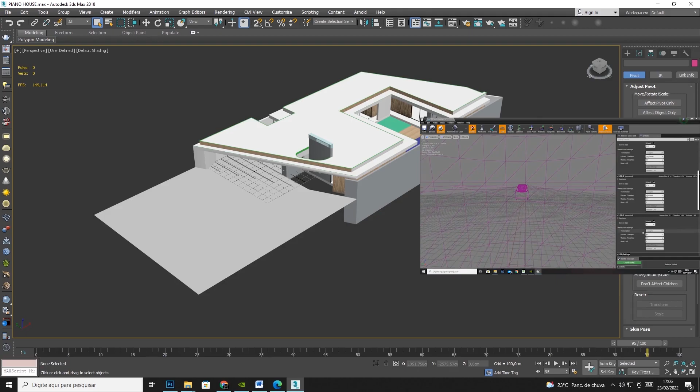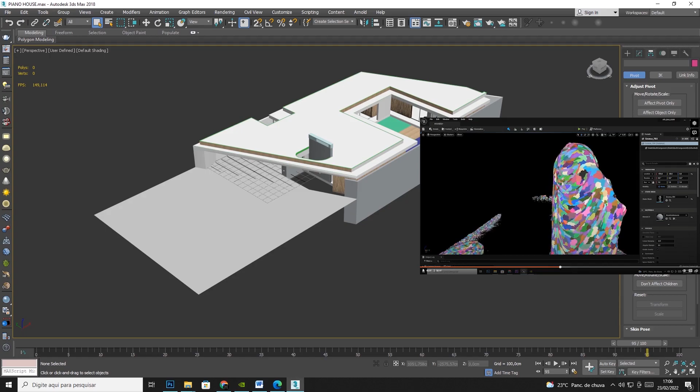We also have LOD in Unreal Engine 5. But in addition, when we get to the optimization module, there is also Nanite, a new technology that came specifically with the launch of Unreal Engine 5. This technology subdivides your object's geometry into clusters. Unlike LOD, this one allows you to use infinite polygon counts for your object. Obviously, there are some limitations, but we will talk about that in the Unreal Engine 5 class, okay? Don't worry about it.

But here in Max, it is already important that we think about how the objects will be optimized in Unreal Engine 5, okay? How do I want to present my project? Like a video, or browsing in real time? If I want to present it as a video, I can render this project. Rendering inside Unreal is much faster than in an offline renderer. When rendering a video, I can abuse the polygon count a little more because I won't be browsing in real time.

Now, if the project is to browse in real time, it's necessary to optimize the geometries well and use the Nanite feature and also the LOD feature that is available in Unreal Engine 4 and Unreal Engine 5. What do I have to keep in mind when talking about Unreal? Optimization and organization. Let's see, for example, how many millions of polygons our whole project has in the scene. How can I do it?

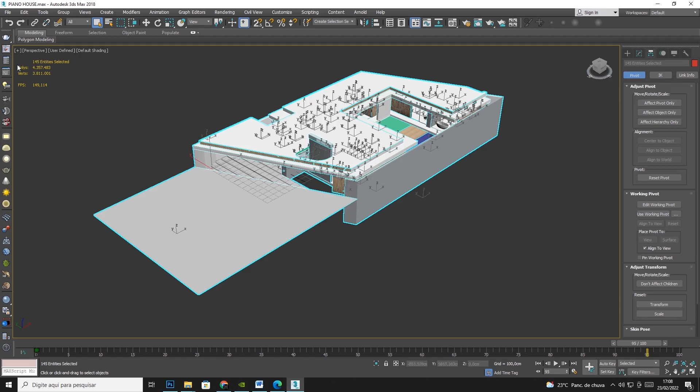In my case, you just select everything because I already enabled the stats in the scene. If your Max doesn't have the stats enabled, you can enable them by clicking here and right here, statistics, you're going to select this and activate this as well. Okay, great. Click right here, and then click right here. Cool. Once this is done, it will show you the statistics.

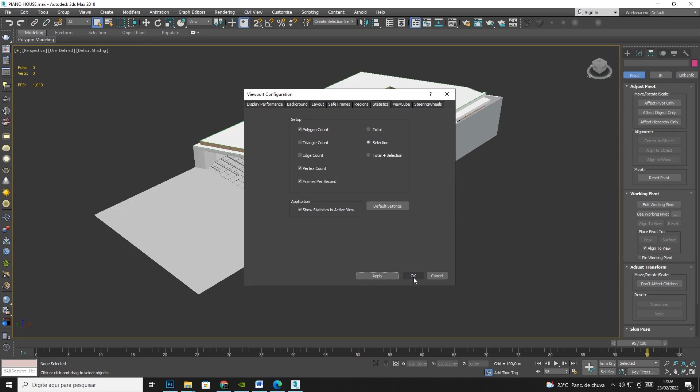So if I click here on the street, I have 2 polygons and 6 vertices. If I click on the ceiling, I have 63 polygons and 122 vertices. If I click on the couch, I have over 200,000 polygons. If I click on the armchair, I have almost 630,000 polygons. That's a lot of polygons to use inside Unreal. So I always have to think about optimizing my scene.

Currently in 2022, the year this video is being recorded, ArchModel blocks, MaxTree blocks, SpeedTree blocks were not meant to run in real time. They were meant to be rendered in offline renderers like Corona and V-Ray. So these blocks did not start from the premise of optimization, but from realism and a high level of detail. Working in real time is actually a great challenge: you need to reach equilibrium between optimization, a low polygon count, and an object as detailed as possible.

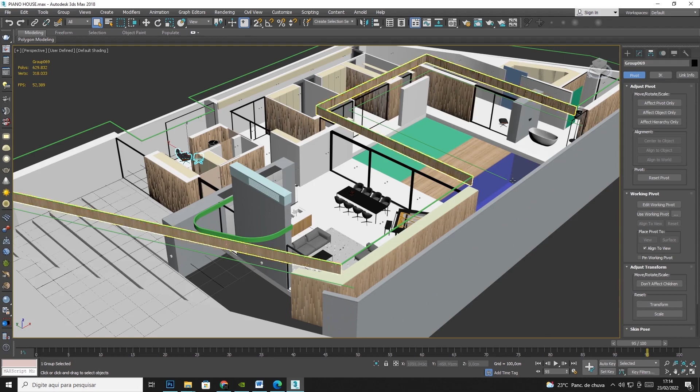Today in 2022, Unreal Engine 5 with Nanite technology doesn't support Nanite on objects that have mesh deformity. What is a mesh deformity? It's an animation, for example. Let's take this bathtub here, and let's think that I'm animating this bathtub, and I'm going to add a modifier, which is the noise modifier.

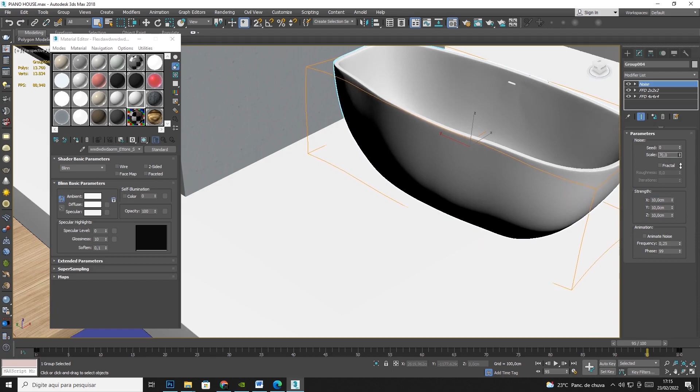Let's change the geometry here to 10 centimeters. Let's see. Look, you can see the mesh being deformed, right? And this deformation is done in geometry. When we use the Nanite technology, it is not possible to apply Nanite to objects that are deformed, okay?

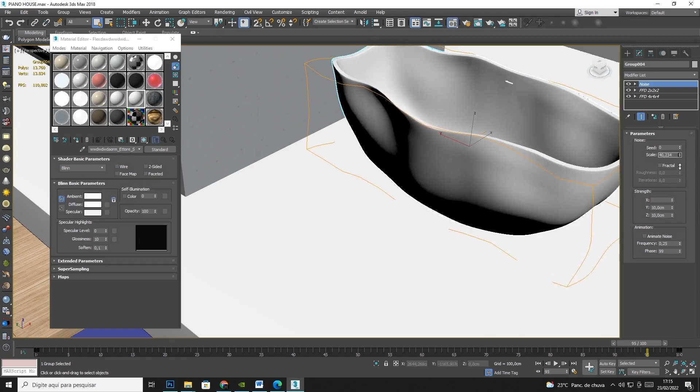For example, if you have a real-time character that is walking in your project, that character cannot use Nanite for optimization because the leg movement causes deformations in the geometry. And Nanite does not support these deformations of the geometry. So in this case, you would use LOD because LOD will support the deformation.

So let's think about this project here. We won't have any deformity in the geometry, okay? The bathtub will not be animated, and there will be no deformity. Cool? If your object, for example, is going to be animated and is going to move like this, and it doesn't have any deformity, there is no problem, okay?

Nanite will work, okay? The Lumen, which is the lighting system we use on Unreal, we'll talk about it later, don't worry about it. If your object has deformity, it won't be compatible with Nanite, okay? Then you will have to use LOD. We're gonna talk about it. Let's get back to the polygon count.

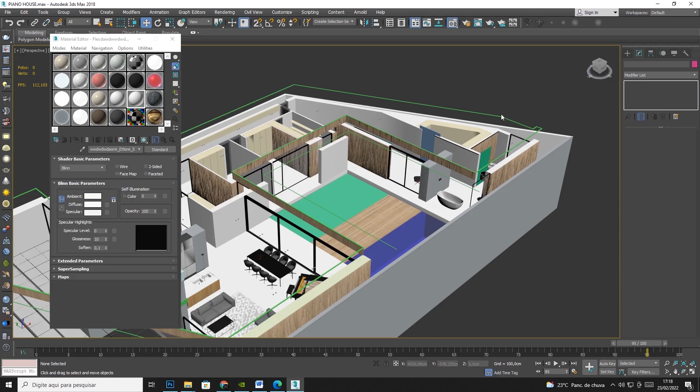Look at this. Starting from the idea that for this project I won't have mesh deformity animation, I'm basically going to use Nanite for almost everything. But don't worry, because I'll teach you how to use LOD on Unreal, okay? Meanwhile, let's just worry about Nanite. Nanite allows us in Unreal Engine 5 to use a basically unlimited amount of polygons.

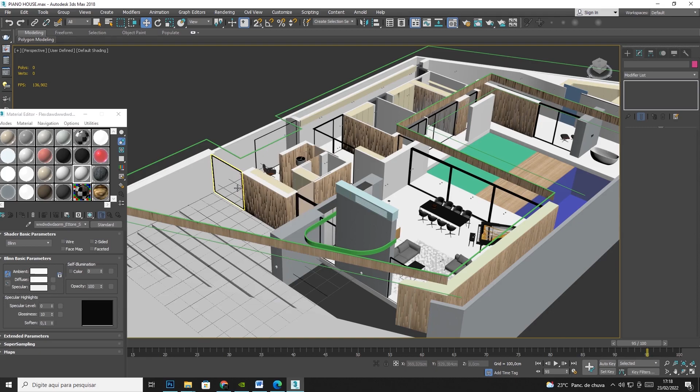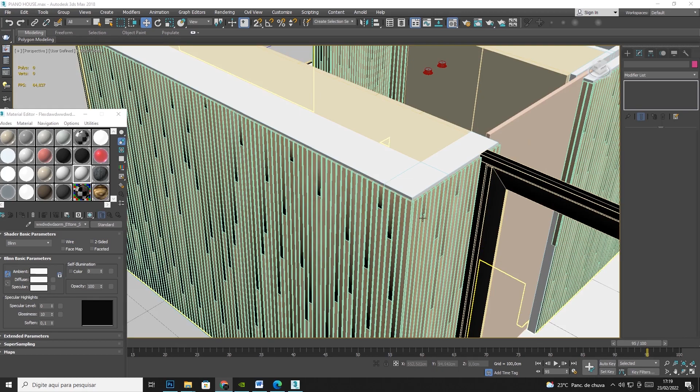Check it out. We can, for example, bevel the edges of these little pieces of wood here. In Unreal Engine 4, this was almost unthinkable because there are a lot of polygons. But since I'm thinking of turning this object into Nanite, I can overdo the polygon count.

So you ask me, okay Dennis, do I have a limit on polygons in my object? Basically no, but it's good that you don't spend more than 1 million. Because depending on your GPU, your graphics card, it's not cool to abuse the polygon count too much, okay? Go between 5,000, 500,000 and maximum 1 million, okay?

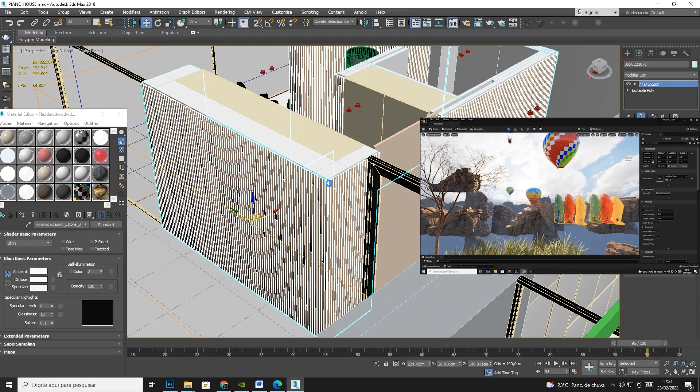Because when importing this file to Unreal, when it saves or compiles the elements in its scene, it may close because there are too many polygons for the GPU to process. But once that file is in Unreal and it's usable there, you can replicate it infinite times. For example, you can have a bed that has 500,000 polygons, take it to Unreal and replicate it 1 million times, okay?

This amount of model duplication will have no impact on the frames per second. Frames per second is the name we give to how many frames your GPU can render each second, okay? Just like in a game, that is the FPS, okay?

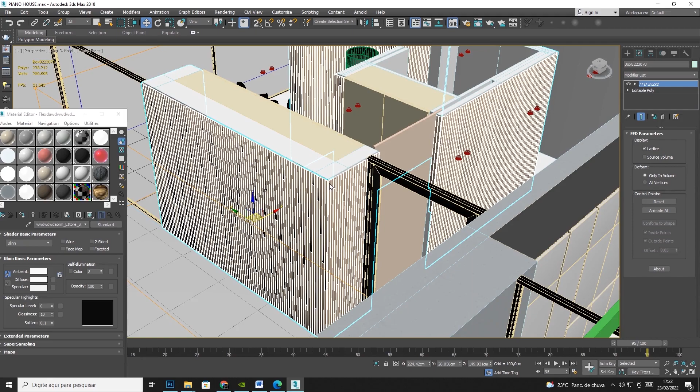There are several names, a lot of confusing things if you're seeing Unreal for the first time, but don't worry, okay? Because as the course goes by, you will get familiarized with navigating and using the tool. Things will be much simpler than you think, okay? So don't worry, because things will be pretty easy for you.

So let's adapt this idea to your project. Will I have geometries in my animation that will deform? Will it move, distort? Will there be a deformity in the mesh? If the answer is yes, it's better to use LOD, okay? If the answer is no, if the furniture will be animated just by positioning and I won't have mesh deformity, I can use Nanite, cool?

So if we are going to use Nanite, I can have more polygons in my object. I can go from 0 to 1 million, depending on your GPU. That's per object, not the whole scene. So for example, the armchair over there has like 600,000, okay? That's a high amount, but it's a super detailed model.

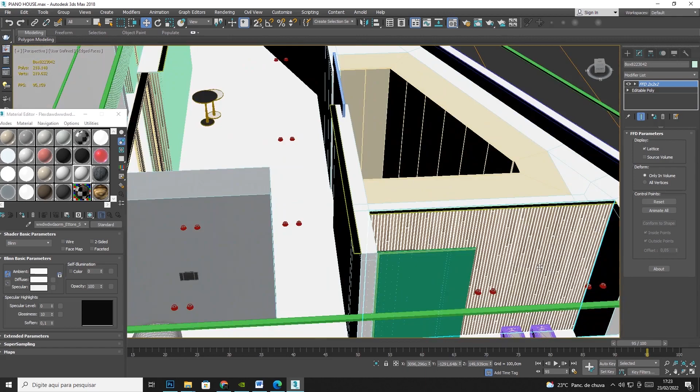Look at this. We can see that the armchair here has a lot of lines, many polygons, okay? So I can have this object that has 600, the chair that has 30, sofa 200, this one 16, the bathroom 200, the other 280, this one 350,000, okay?

As I won't have geometry animation, just object positioning, which is just the object moving, I can use Nanite. So I can start from the idea that I can go from 0 to a maximum of 1 million polygons per object, okay? Otherwise, I will use LOD.

This class is a little bit more informative about optimization, but don't worry about it. We'll see how to do optimization in practice.